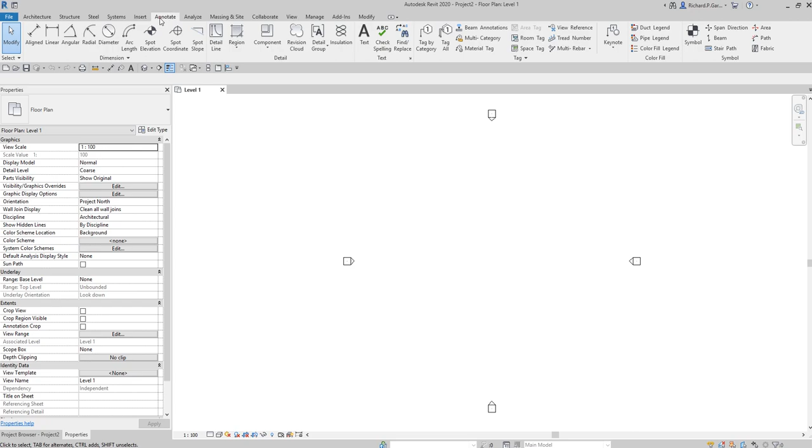So again, for you to be able to follow, I'm just going to use a generic template to create my project. So I'm going to select the architectural template, and then select OK. All right, so from our floor plan, I'll just create a line. I'll go to the Annotate tab and select Detail Line. And then I'm just going to create a straight line, about 10 meters or 10,000 millimeters.

Okay, so this is where I'm going to place the families. For example, I'm going to place a chair here, and I want the chairs to be placed equally divided. So I'm going to use Dynamo for that, although I can just simply place it here. But you can use Dynamo to do this. So let's hit Manage and then go to Dynamo. Just click that one.

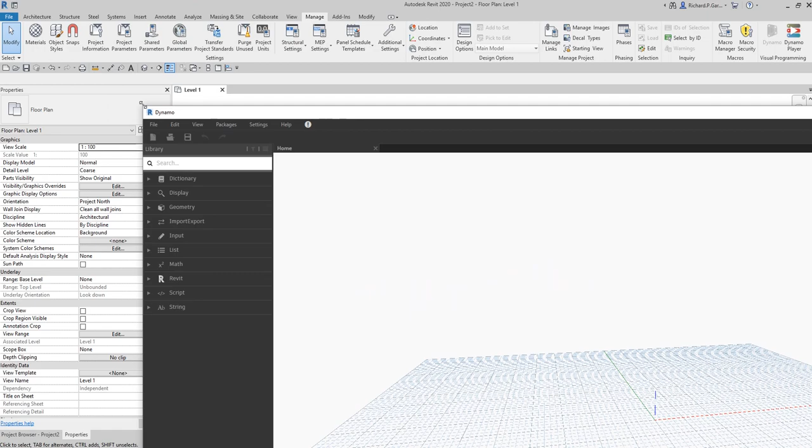Okay, and then we are going to create a new workspace. Now let us use the node that we learned last time, so we will be selecting the model element. Let's look for Select Model Element. I'm going to select element, not elements, because I'm just going to select a single element. As you can see, it says nothing selected. We know this already. We're going to click Select, and then select the line here.

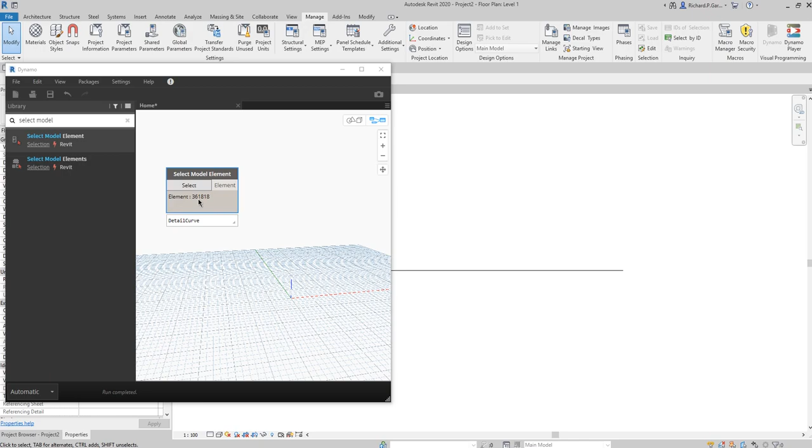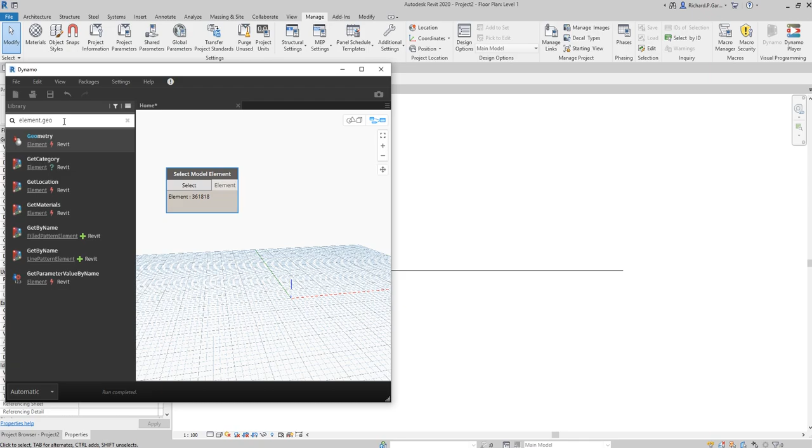Once you do that, Dynamo will read that as an element, 361818. That's the element ID, and as you can see, that's a detail curve. Now the next thing is we are going to use Element.Geometry in our Dynamo. So I'm going to look for Element.Geometry. This one gets all the geometry associated with this object. We have been using this in our last couple of videos, so you should be familiar with it. I'm going to connect the element here. There you go, there's the line.

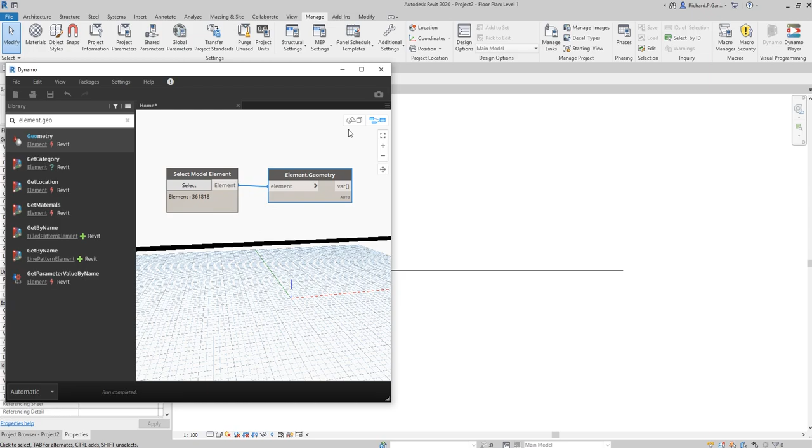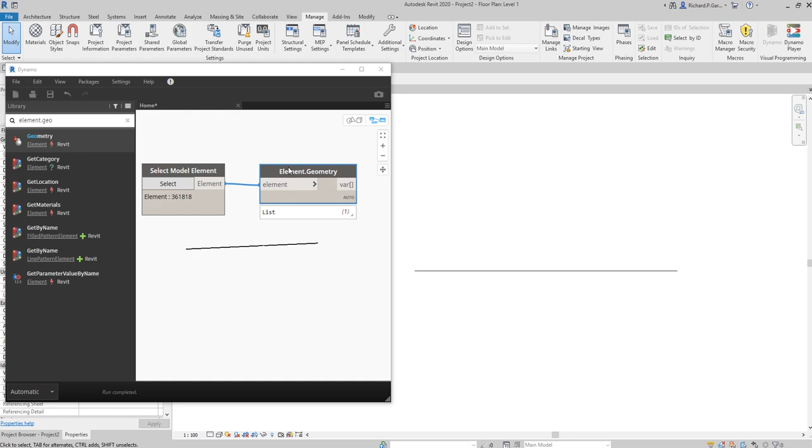If I change the preview background, as you can see, that's the line that we just selected, generated from Revit. Okay, going back to my navigation graph. The next thing is, let's say I want to divide this line into 8 equal parts. We don't have a divide command in Revit, so you need to do it manually. But with Dynamo, you'll be able to do that automatically by using this new node that I'm going to introduce to you.

Dynamo calls this node Curve.PointsAtEqualSegmentLength. This is the new node that we are going to learn today, so just select that one. The definition is it returns points spaced equally along the curve length based on the input number of divisions. As you can see, you have two inputs: the curve input, which is the line that we have, and an integer for the division input. And the output becomes points.

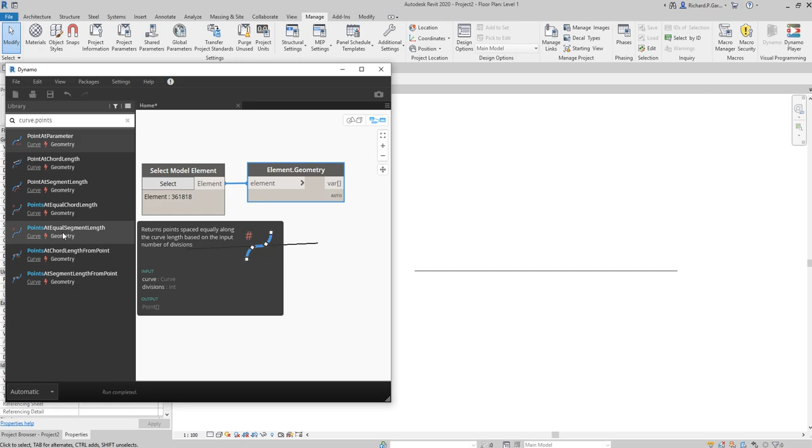Okay, so I'm going to select this one. So those are the two inputs. All right, we already have the curve here, so I'm just going to connect the curve.

Now for the division, as you can see here, straight off the bat, it already created here a point. Okay, so by default, if you are going to hover your pointer to the division, the default value is 10. That's why, as you can see, Revit or the Dynamo automatically divides our line here into 10 equal parts. 1, 2, 3, 4, 5, 6, 7, 8, 9, 10. So as you can see, we have 10 equally divided segments here.

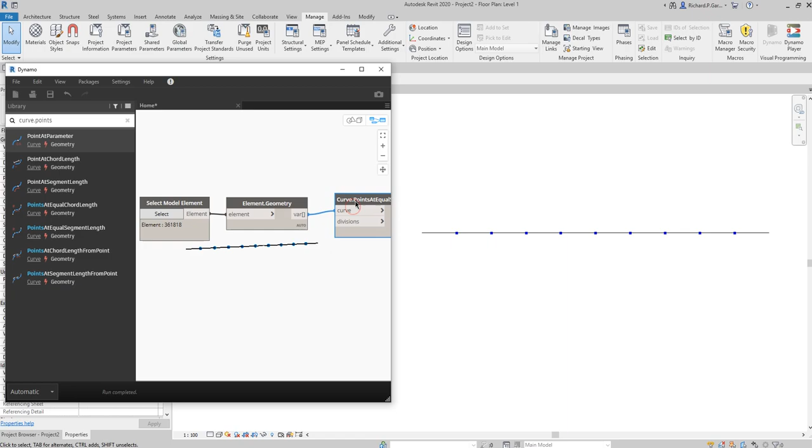So since I do not want 10, let's say I want 8. So what you can do is you can use the number node, or you can just create a code block. Just double click at the empty space and then it will create a code block. So let's say I want 8, so I just type 8 and then I just click outside, and there you go. So I'll just need to connect that to the divisions. There you go. So I now have here 8 equally divided segments. 1, 2, 3, 4, 5, 6, 7, 8.

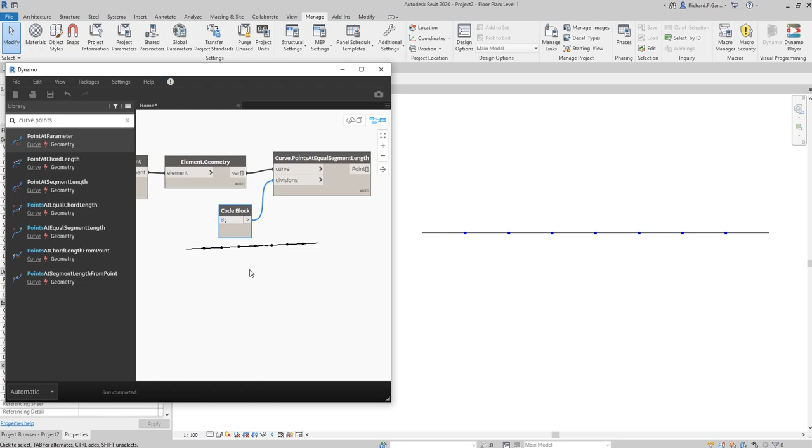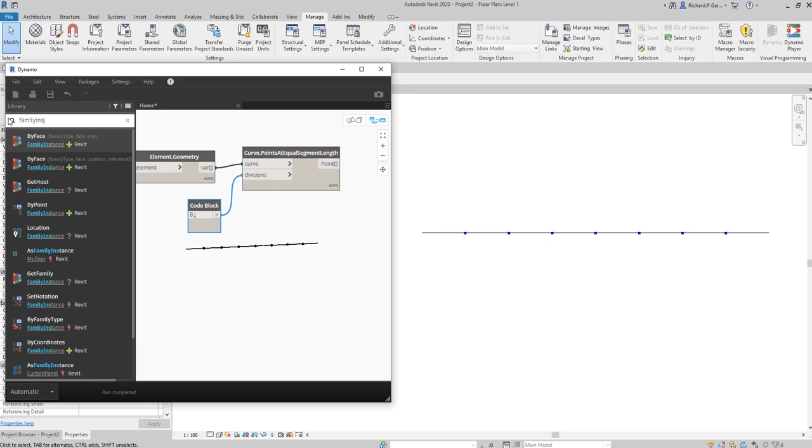All right, so now that we have managed to divide our segment here, the next thing that I'm going to do is I'm going to insert a family. Like for example, I'm going to insert here a chair at these points here. So to do that, I need to look for that new node that I'm going to introduce to you guys, which is family instance. Okay, so family instance by point. This one. Okay, so it places a family instance given the family type.

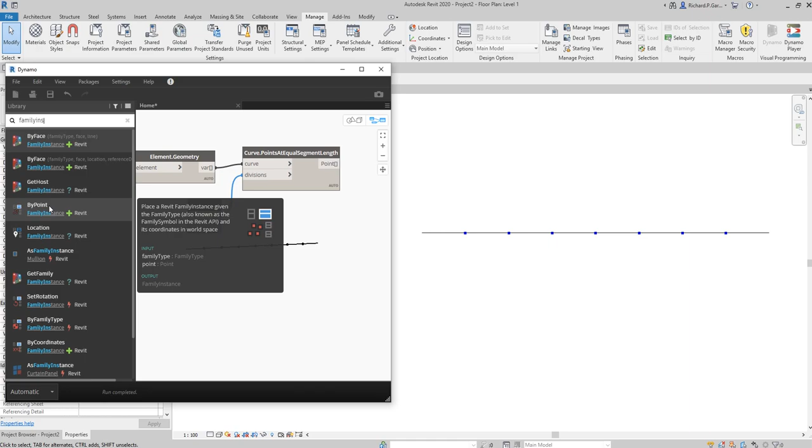So that's one input. So we need to input the family type and its coordinates in world space, which is the point. So that's another input. So you have two inputs here. You have family type and then you have the point input. And then the output, that's the family. All right, so I'm going to select by point family instance. So just click that one. So as you can see, there's our two inputs there. Okay, so for the point, it's already given. So I'm just going to connect the point there.

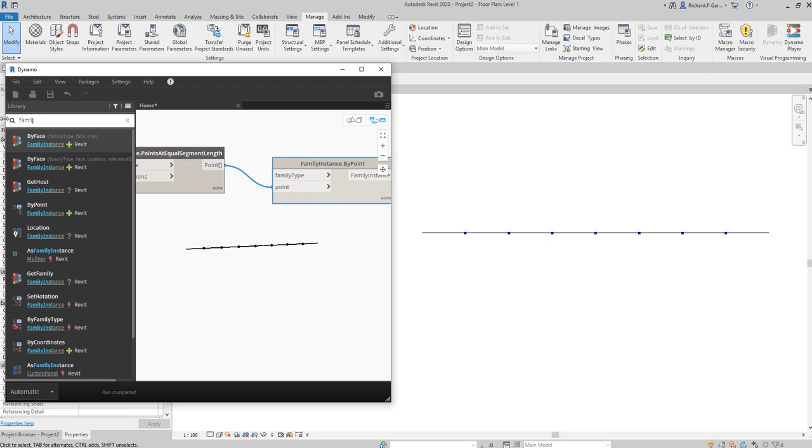And then for the family type, we need a family type here. So let's look for family type. Family types. There you go. Just click that one. And then all the family types that you will be seeing here when you click the drop down arrow, these are all the family types that are currently loaded inside the project. Okay, so I'm going to look for the chair. Okay, so I don't have the chair.

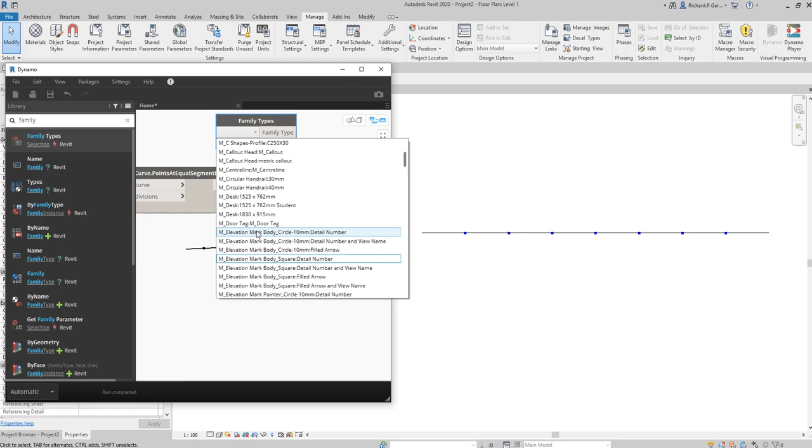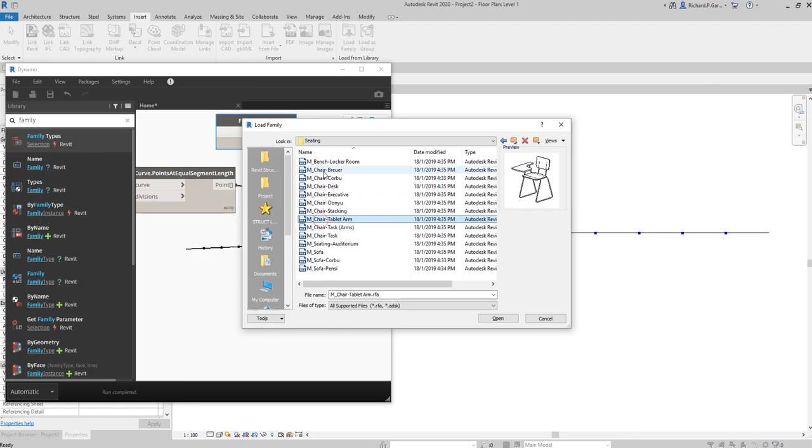So what I'm going to do is go back to Revit, go to architecture, component, place a component, or I'll just go to insert and load it. Insert, load family, and then let's look for, okay, furniture, seating. Let's look for this one. So for example, this is the chair that I want. So I'm going to open that to load inside the project. Now, going back to the family types, just click the drop down here. You should be able to see that now. Okay, so there you go. So there's our guy there.

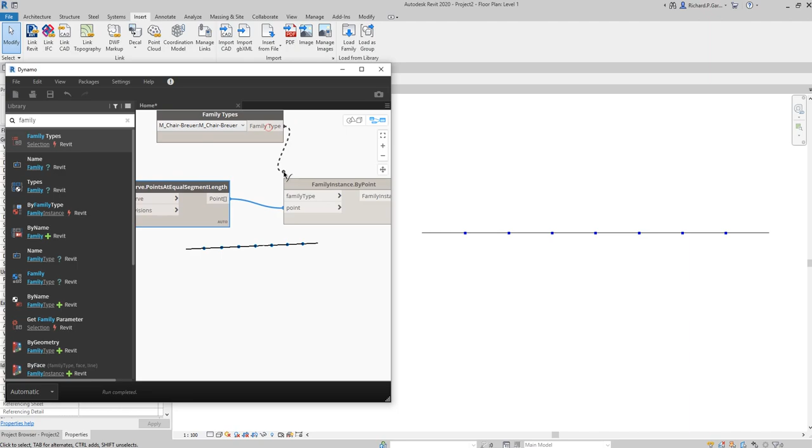So just click that, and then you can now attach that. Okay, just click, and there you have it. Okay, so in our Revit, there you go. So there's now our chair. So if I go to the 3D view, there you go. See? So that's how you simply do that in Dynamo. So you can save this file so that in case you want to place an instance of families with equally divided space, you can just use this file to open and place the family that you want.

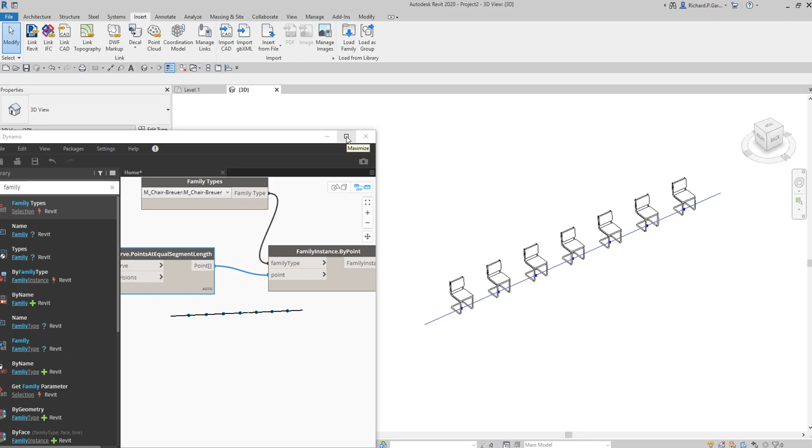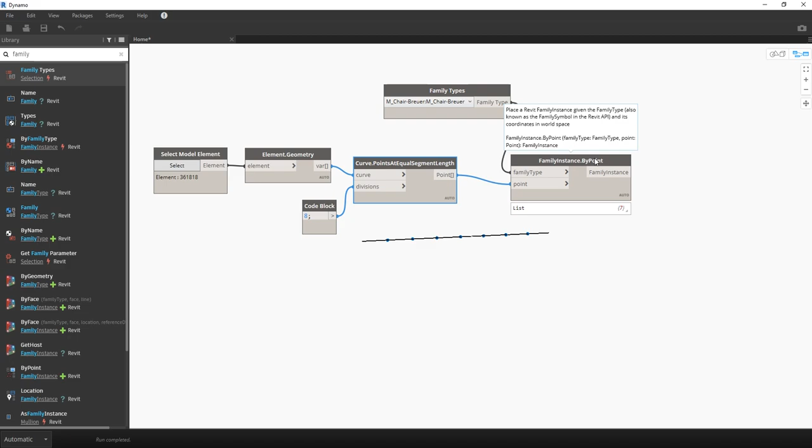Okay, so basically this is our learning for today. So today, just a recap, we have learned a couple of new nodes here, which are curve points at equal segment length, and then the other one is family instance by point. Okay, so hopefully you guys learned something from this video.